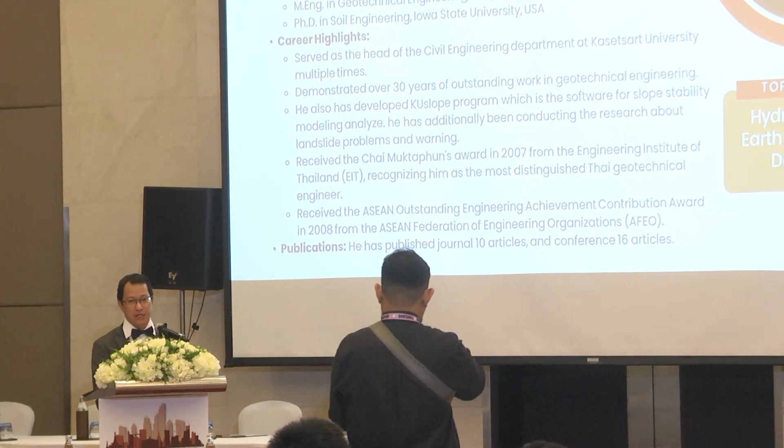He has so much professional work in the past, many dams designed by him, many dams rehabilitated by him. This is perhaps one of the topics he's going to discuss today: the latest project that is going to start soon. He did a lot of research and work on that before we erect the project next month.

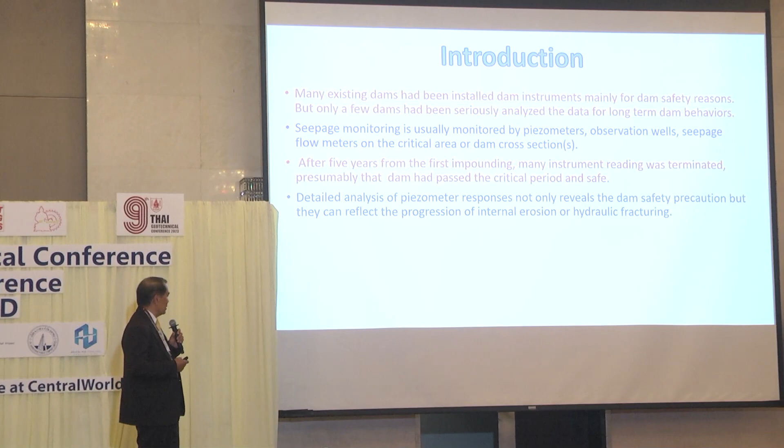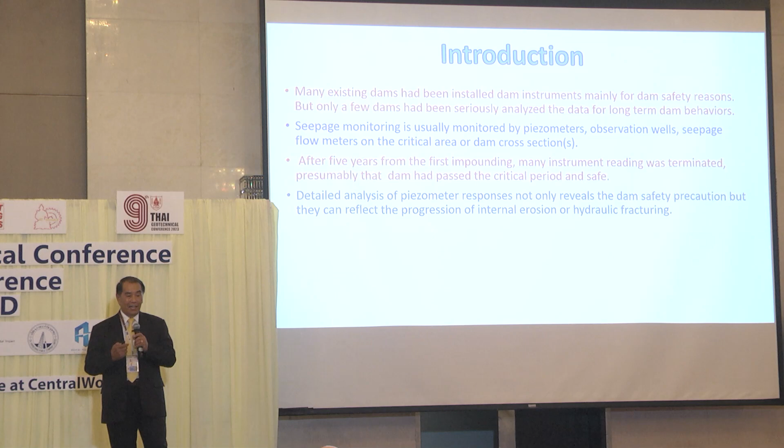Well, detailed analysis of piezometer response not only reveals safety precautions, but also reflects the progression of internal erosion or hydraulic fracturing. So if we take it seriously, we can detect the symptoms of hydraulic fracturing.

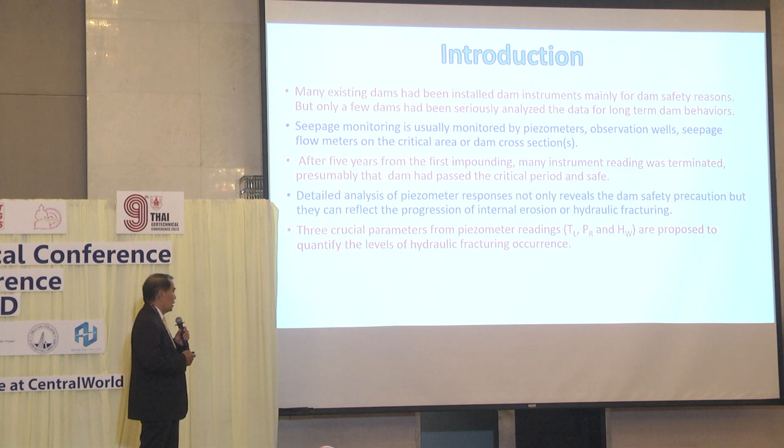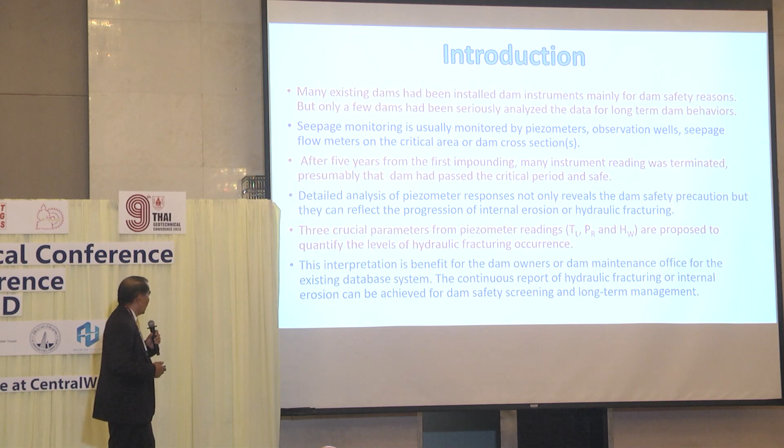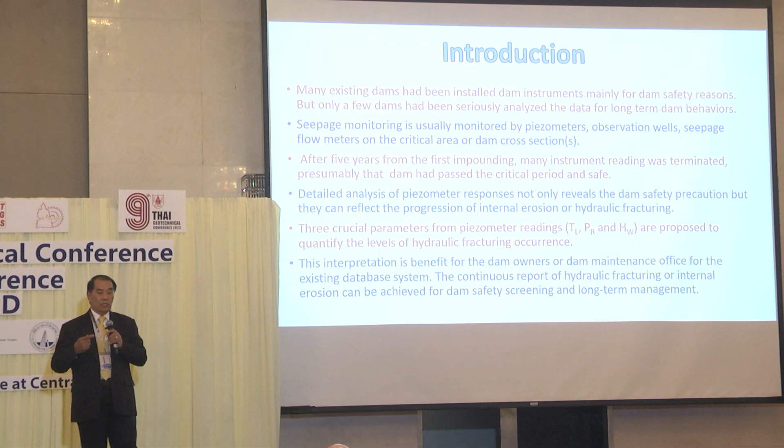So we propose three crucial parameters: time lags, pore pressure ratio, and reservoir water level, to quantify the level of hydraulic fracturing that can occur in the dam. This interpretation not only benefits the dam owner and maintenance office, but if combined with the dam monitoring database, it can continuously tell us the condition of internal erosion or hydraulic fracturing.

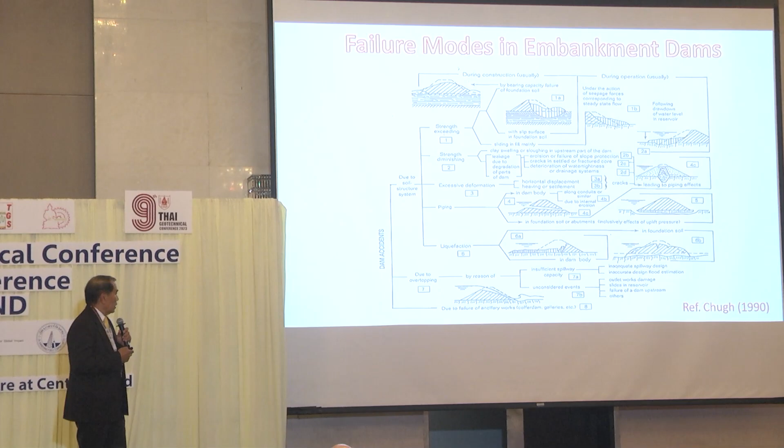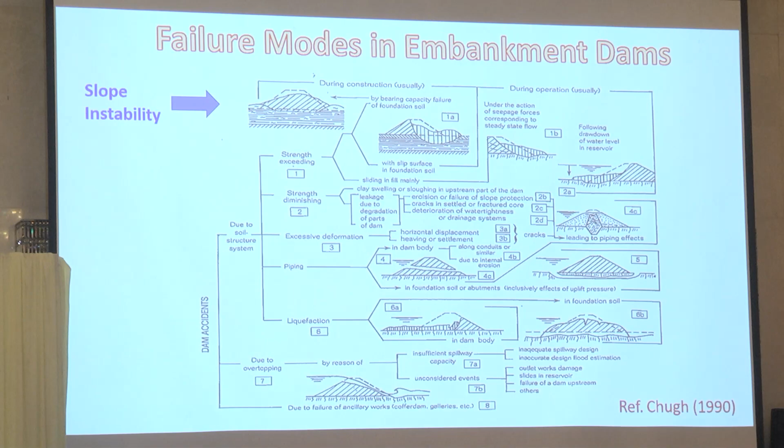Okay, I will take a short time to review dam failure statistics. Generally, a dam can fail due to instability of the dam itself—either the downstream or upstream slope can fail or slip—or it can fail by internal erosion, or it can fail by overtopping when you cannot estimate the amount of inflow correctly.

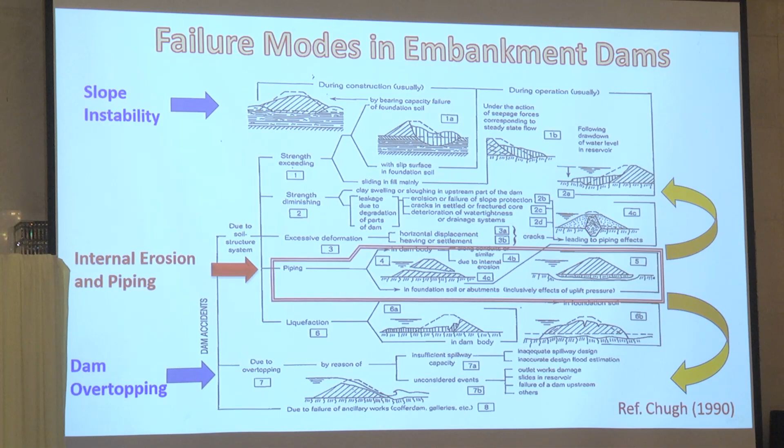But for internal erosion, not only can the behavior itself damage the dam, but it is also well related to the slope stability of the dam. If the pore pressure gets high, the factor of safety for slope stability gets low. And at the same time, when part of the dam fails, overtopping can also occur.

Okay, this is data from ICOLD, I think quite recent. Most of the dam types are earth dams, more than 65%. The purpose of the dams is mostly for irrigation. It's the same statistic in Thailand—most of our dams are for irrigation, okay.

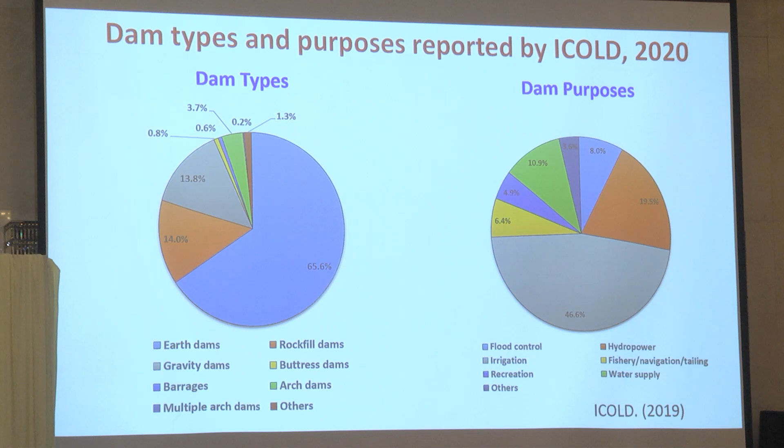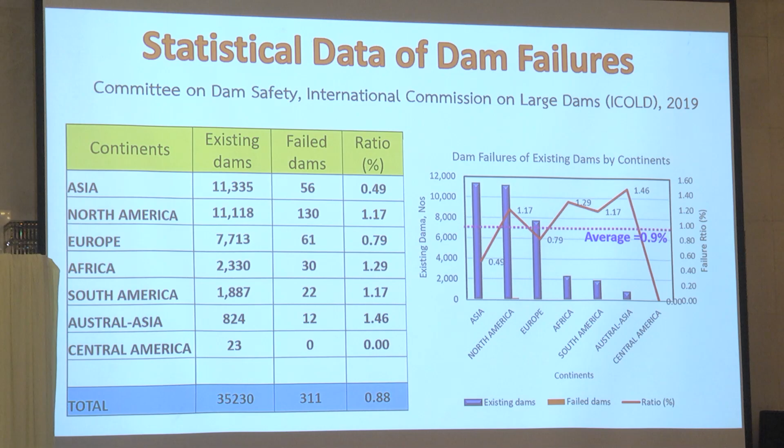For existing dams all over the world, classified by continent, the ratio of failed dams can vary by location. But in total, the average of failed dams is around 0.9%, or we can say 1%. That is quite high. In Thailand, fortunately, it's not that much.

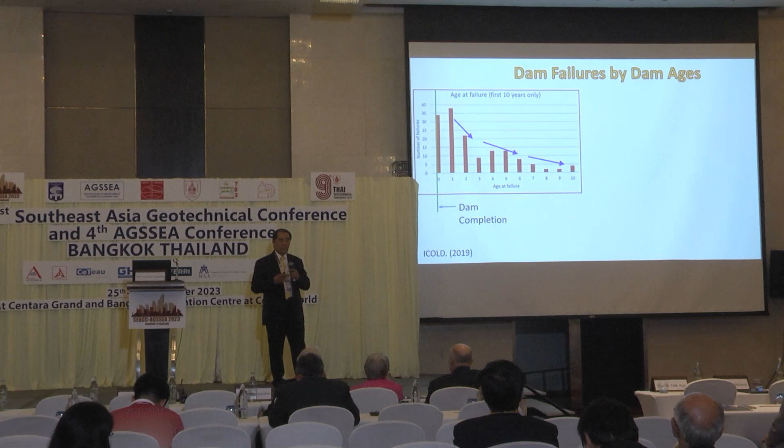After a dam is complete, statistics show that in the first year, just after first impounding, dams failed at a higher percentage, and then it decreased. Long-term data reveal it increases again when the age of the dam is more than 50 or 100 years or so, starting to increase again mostly due to deterioration of the material.

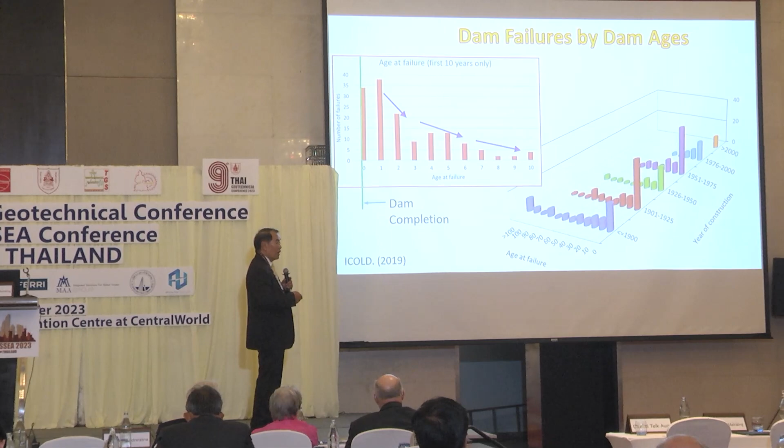It also reveals that before the 20th century, dams failed quite a lot. After that, dam technology got better and better, and the number of dam failures was reduced.

Especially after the World War, many military engineers came back from the war and brought so many technical inputs for the dams. Surprisingly, the issue concerning dam failure is a geotechnical issue, and from the past to the present, it seems to be decreasing, getting lower and lower.

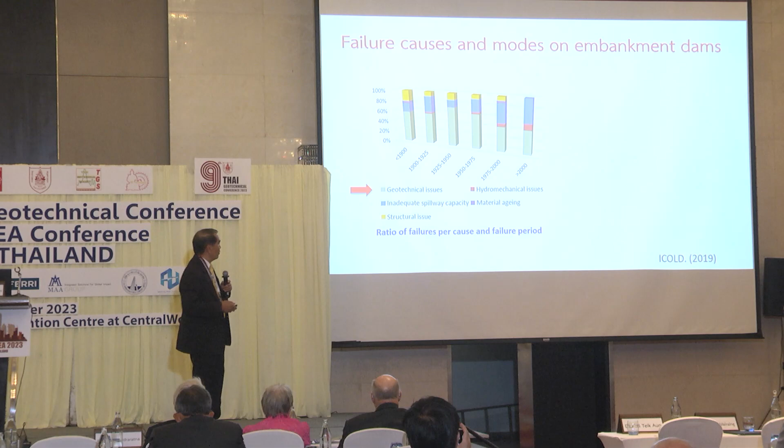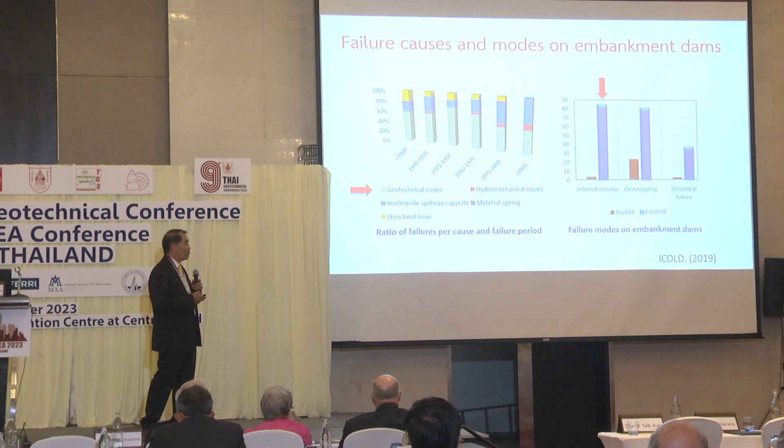And the mode of failure, internal erosion, is the top one. That gives you an idea how important internal erosion and hydraulic fracturing was. So now I will lead you to hydraulic fracturing in dams.

In the case study, people said Teton Dam was a classical failure that we learned a lot from. The erosion on the right abutment started at about 3/4 of the height, then progressed very fast, and finally it completely failed. It fell within 4 hours. I think the remnant of the dam still remains for study, but I'm not so sure—Professor Nelson can confirm.

USBR usually keeps this dam for case study.

The independent panel revealed that it's probably due to arching effects at the narrow core trench of the dam. Because this core trench is so narrow, it creates arching of the stress, bringing the stress within this area very low. Then if the stress is low, the pore pressure can exceed the confining stress and expand the crack or create a new crack.

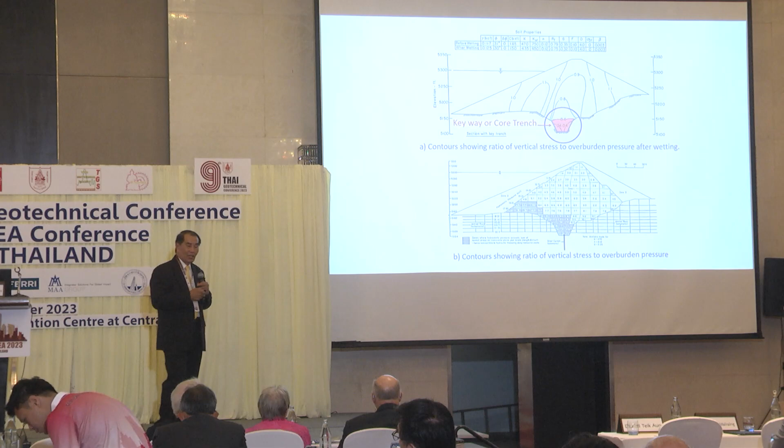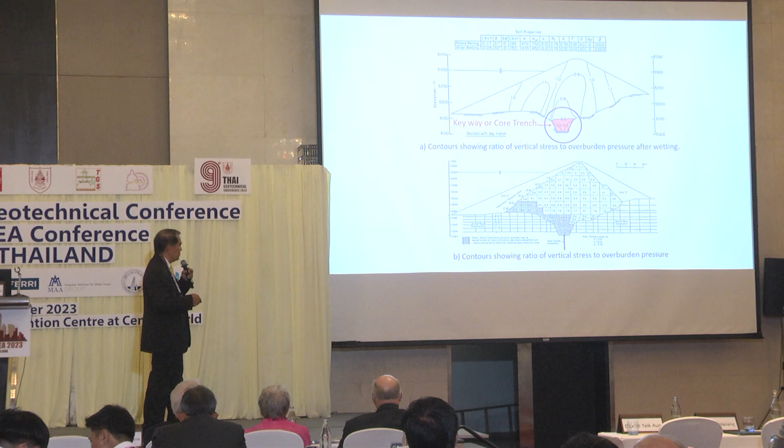This also agrees with some of the first finite element analyses, done I think by University of California at Berkeley, which also agree that there will be a zone of low stress over there.

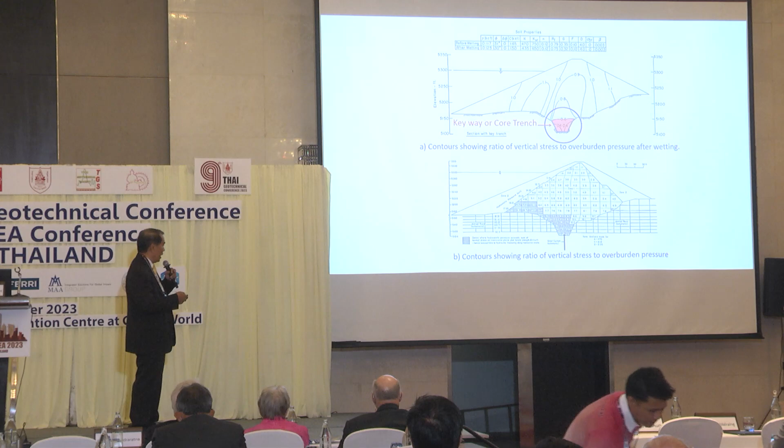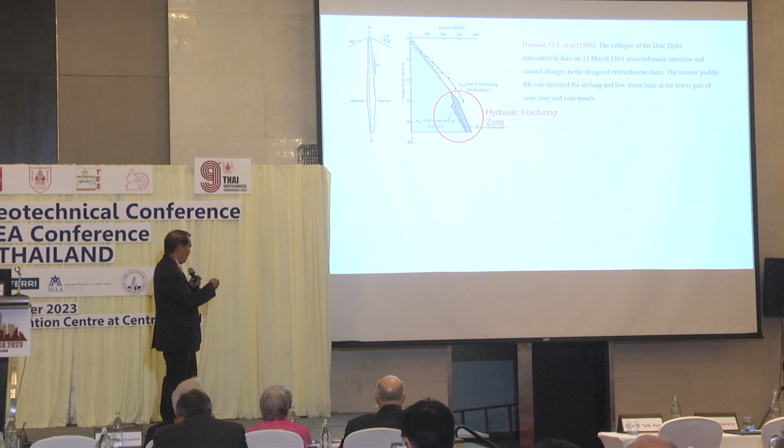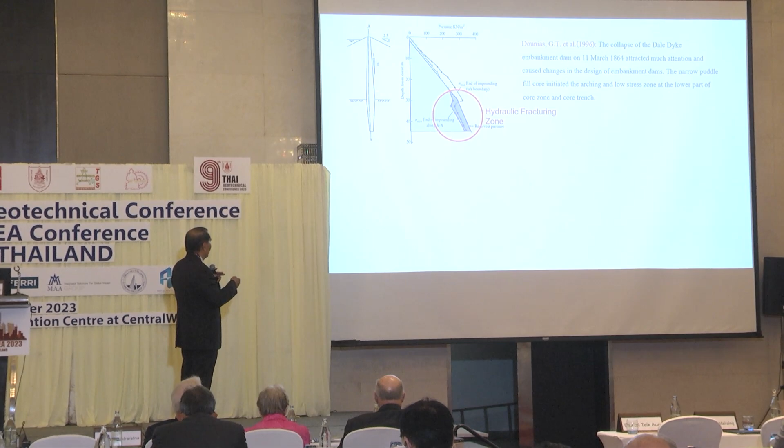Other dams too, like the Dale Dyke Dam with a very narrow puddle clay core, very thin, create hydraulic fracturing due to arching of this portion. That's why the pore pressure exceeds the minor principal stress in that area.

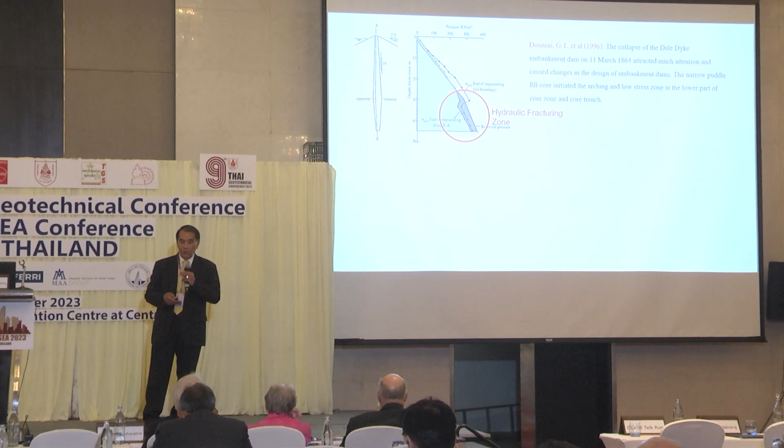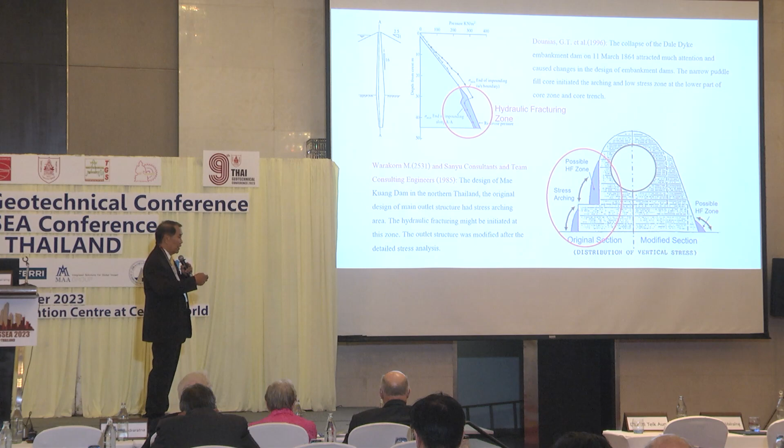Some classic failures or damages in our dams, in Nakhon Ratchasima, is Munbon Dam—that is internal erosion through the foundation of the dam. Fortunately, we participated in that occasion and also in the design of the remedial work for this dam.

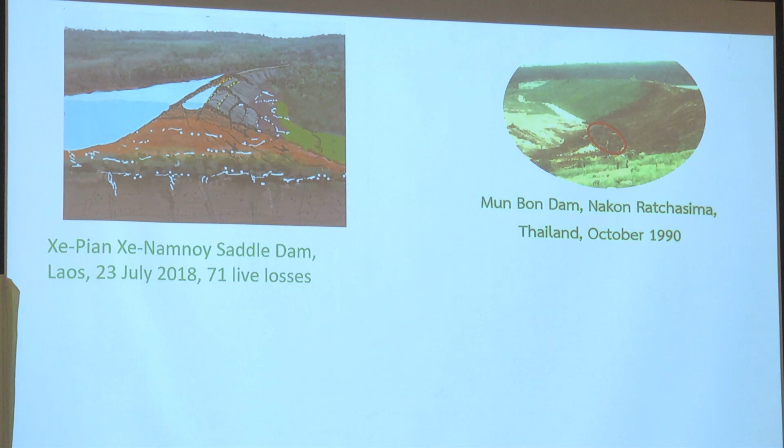Recently in Laos, the Xe-Namnoy dam also failed. There is literature saying it might be due to hydraulic fracturing through the foundation of the dam, but this case is not disclosed yet because it's still in court, so we don't know much about the data.

Sherard also mentioned that if there is any irregular shape of the foundation, even with a well-compacted embankment, it can create a low stress zone or arching zone, so in the yellow area the water can seep through.

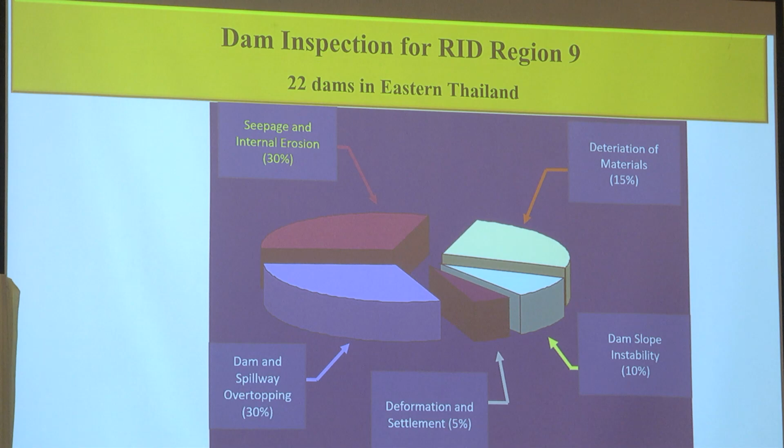The data I myself participated in for RID—we investigated about 22 dams. Not all of them are damaged, but we wanted to see the possible damage in the dam. It's concluded that seepage is one of the large percentages; it is seepage and internal erosion.

So what does hydraulic fracturing mean? It means that if there is an existing crack or a new crack that happened from differential settlement or any arching or something like that, the water can seep through. And if you have low stress, where sigma 3 is lower than the hydraulic pressure, then the crack opens up and the seepage progresses. That is a simple equation.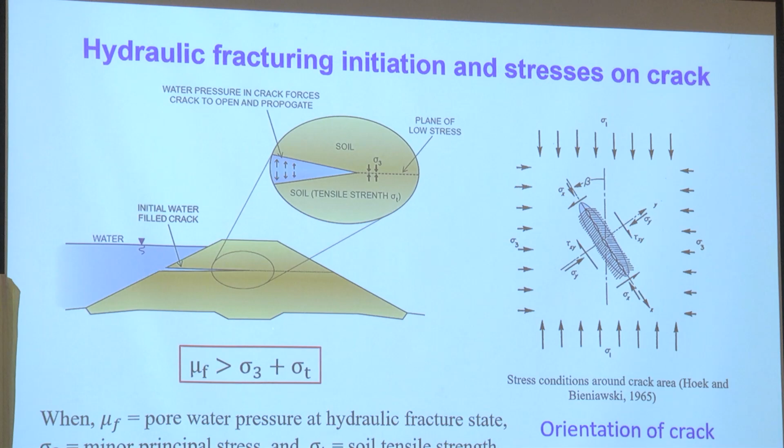So first, we want to see any relationship between the crack width and the permeability increase. Because this should tell us what is the possibility that the seepage increases with the permeability increase.

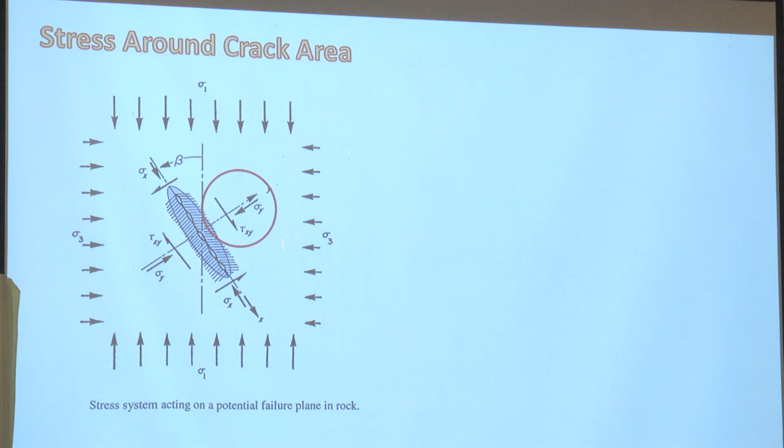So we try to set a model, using the basic soil mechanics theory based on the Mohr diagram that analyzes stress. We want to see if the normal stress, normal to the crack alignment, would be how much, and how it would create the closing or opening of the cracks. So we try to use that Mohr diagram.

Why? Because the orientation of the crack may not be horizontal. It can vary, depending on the foliations of the rock and the orientation of the rock structure itself.

So let's see, if we take one crack, it should be very small width, not as big as this. Normally if cracks exist, they fill with what we call filler, a piece of rock that flows in first, and if it's not large enough, it will plug into the crack.

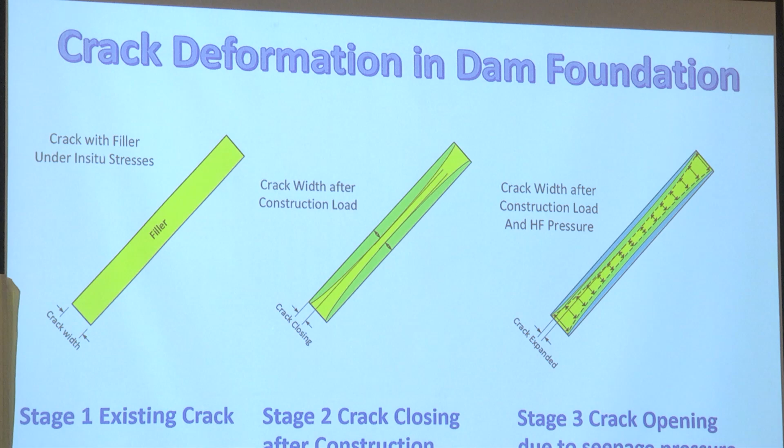And then after the impounding, the water in the reservoir starts to seep through and starts to open the crack again. So these concepts can be modeled by just simple finite element analysis.

So I will try to put this part going up so we can see that this is the wall of the crack, this is the wall of the crack, and when the construction loading comes up, the crack is closing.

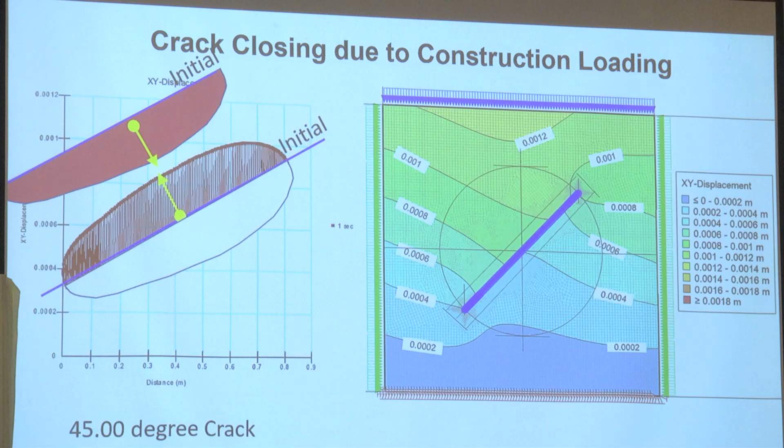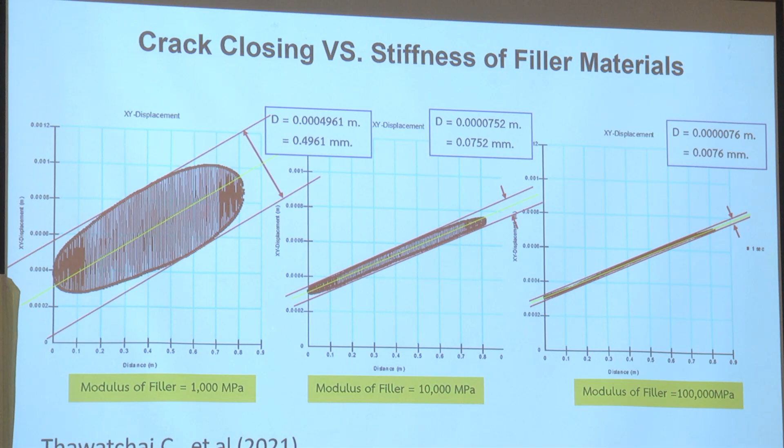So the crack closing depends on the modulus of the filler. If the filler is strong, the crack closing will be small. So we can analyze that, depending on the modulus of the filler, which has not been studied in detail yet.

Then it also depends on the hydraulic pressure that depends on the reservoir elevation also. When the water impounds at high elevation, the pressure that can expand the cracks will be high.

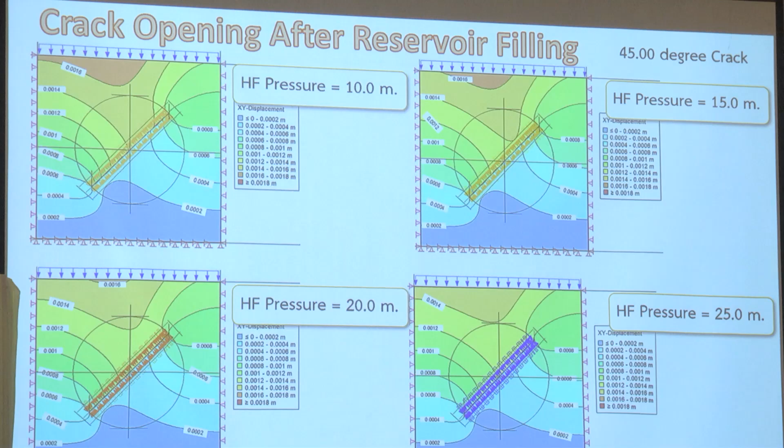Okay, then we think of the rock mass itself not containing only one crack. It may be a series of cracks. How much it is depends on the quality of the rock itself. So we can assume a simple model where the crack is here, with a certain spacing, and another crack is there also.

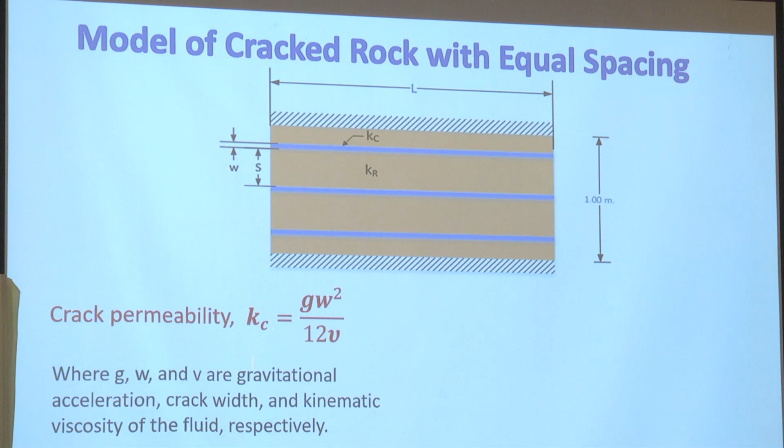So with the crack permeability, this is a crack permeability, meaning the permeability that the water seeps into the crack is equal to that much. Then if we calculate the whole mass with several cracks, the number of cracks...

So we can do what we call equivalent permeability of rock mass with the crack, depending on how many cracks or what the spacing of the crack is. And with that, we can make a relation between the permeability and the crack width and also the crack spacing.

So you see that in this range, the permeability of very, very fine cracks is even less than the permeability through the intact rock itself. So I would say this area we call intact rock permeability control.

So when the crack is larger than that, the crack will control the overall permeability. So we can call that rock crack permeability control.

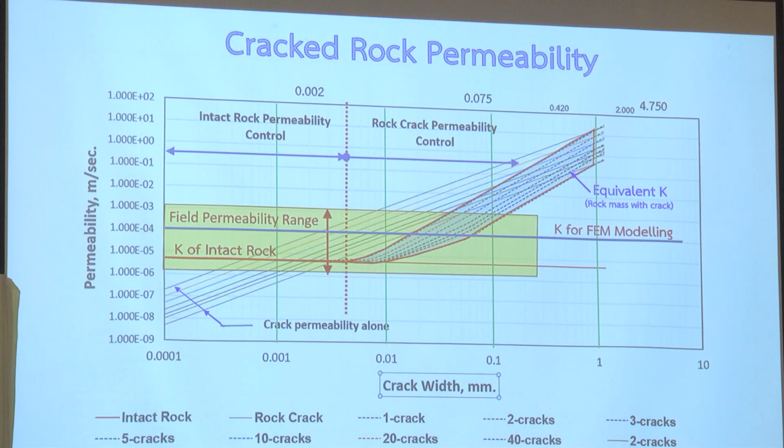In our case, we also compared to what we tested in the field, and it was found that the field permeability range is around that range. So for further analysis, we probably are going to use that for further finite element modeling, which agrees with the field permeability test also.

Okay, come to the case study. The study dam is an earth-filled dam, 33 meters high and about 400 meters crest length. It failed once in 1995.

The failure is quite classical here, and the wet area is found on the downstream toe also. This is the detail of the slump or slip surface, or you can call it a scarp, about 1 meter. Then the dam owner decided to put in a stabilized downstream berm.

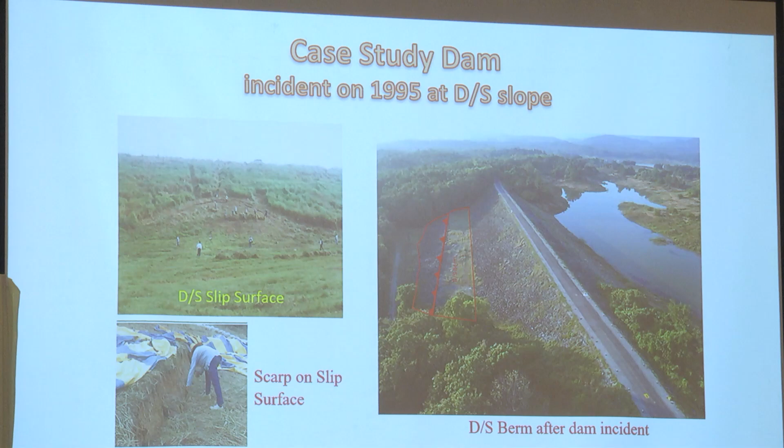Of course, it helps with stability, but it doesn't do anything about the internal erosion or the pore pressure in the foundation. So what we're trying to say is this can happen due to the complex geology of the dam site itself.

This is the dam site. It's essentially sedimentary and metamorphic rock. Why is it metamorphic? Because the intrusion of igneous rock on both sides intruded later and then squeezed the sedimentary rock into a ripple like that.

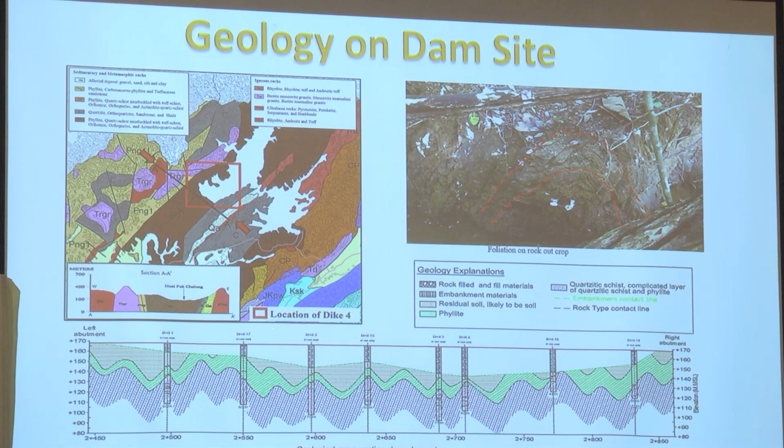So from some of our boreholes and the geological data that we found in the field, we can make an initial layer of phyllite like that. And the parameters from the field observations were compiled, and finally we ended up with some material properties for finite elements.

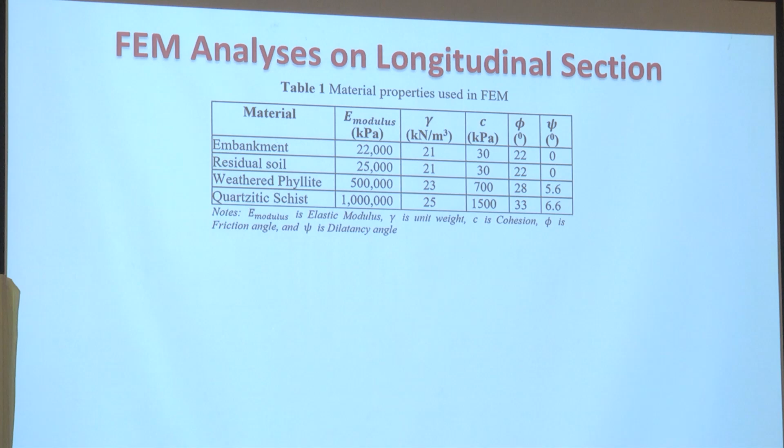And with the finite elements, we can calculate the minor principal stress. And using what we call the Mohr diagram, we can take a look at in which part the minor principal stress is lower than the seepage pressure.

Okay, when that happens, we can spot the point marked by the red dot, and then we can use some simple graphics to map the contour that creates the hydraulic fracturing zone like that.

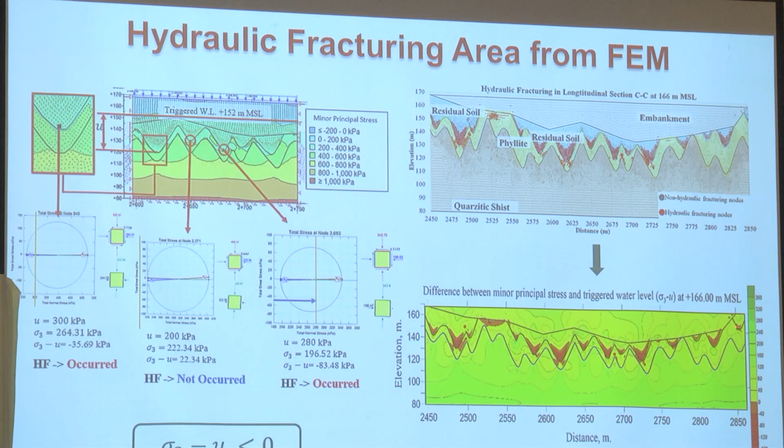This zone depends on the elevation or level of reservoir impounding. If it's quite low, 146, there appears to be no hydraulic fracturing zone at all. When we go to 150 meters mean sea level of reservoir elevation, it starts to show a spot. Going up again, the hydraulic fracturing zone seems to be clear. And going up more and more, okay.

Fortunately, this dam was limited to impound only that much, not over normal high water level. The excess will be released, okay. But even now, that normal high water level is lowered by 2 meters, just for safety's sake.

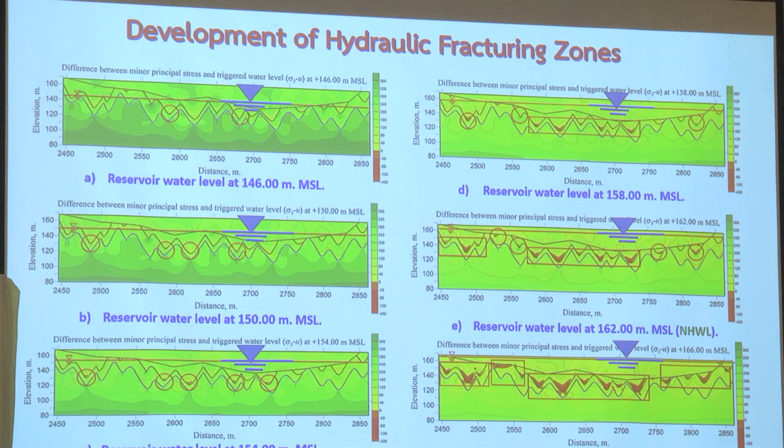So after some finite element modeling, we can set up an index that can tell the possibility of hydraulic fracturing. We propose something like a hydraulic fracturing index here. I will not tell the detail, but it consists of...

First, it concerns the geometry, the ratio of the depth to the width of the foliation. The second term concerns the reservoir elevations, and the third term compares the modulus of the fill material and the modulus of the rock material that has a foliation like that.

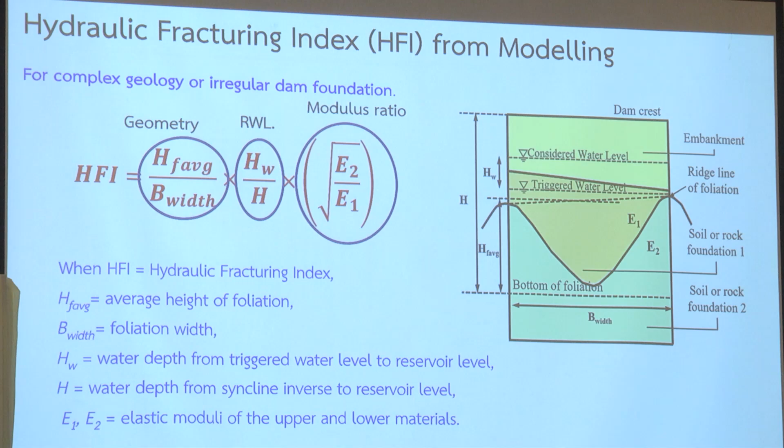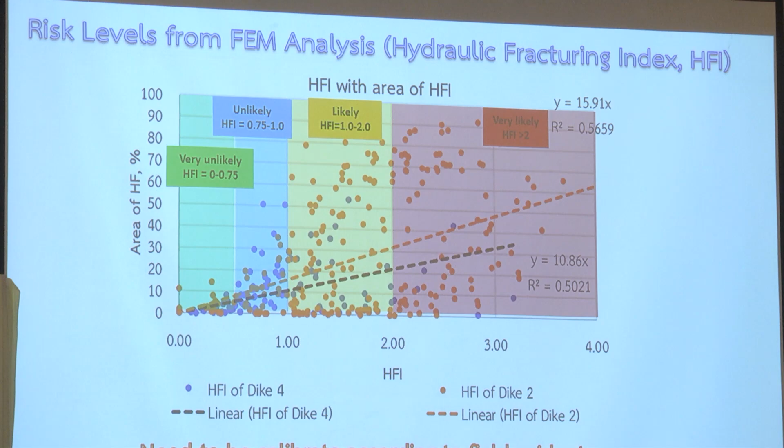So by that, from the analysis alone, we can also tell the level of possibility of hydraulic fracturing from finite element analysis. Why did I propose that? Because if you design a new dam, you don't have any instrument at all. It's not constructed yet. So you have to forecast whether there's any risk for hydraulic fracturing. If so, you have to take care of monitoring later on.

Then come to the existing dam that is already built and monitored. With a simple instrument that Professor Brand kindly presented this morning, dealing with the piezometer—he was a student at that time, and he brought me a lot of piezometers for testing with my master's thesis. Thanks for that, I learned a lot.

Usually the piezometer is the first choice for instrument, and next might be earth pressure cell and seepage flow meter and so on. Maybe most of you are already familiar with geotechnical instruments.

For this dam, unfortunately, before the incident, there was no instrument at all. But after the incident and repair work, the dam owner started to install instruments. So after about 20 years without instruments, and from that incident, we got information about 22 years after that, after we put up the instruments. So the data we are going to show here is for 22 years, the latest period of the dam.

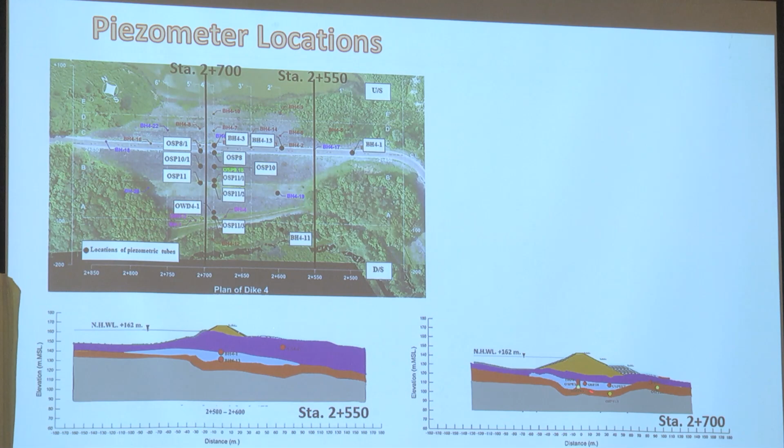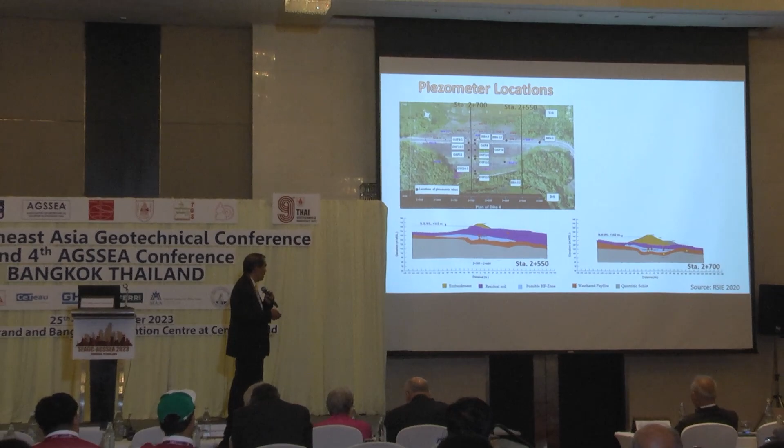The number of piezometers is also limited to the dam axis and the downstream area. The yellow one is the dam embankment itself, the purple one is residual soil, and the lower part of residual soil is probably the hydraulic fracturing area or zone. The brown one here is weathered phyllite, and the lower one is much stronger, a quartzite schist. And this is a list of instruments.

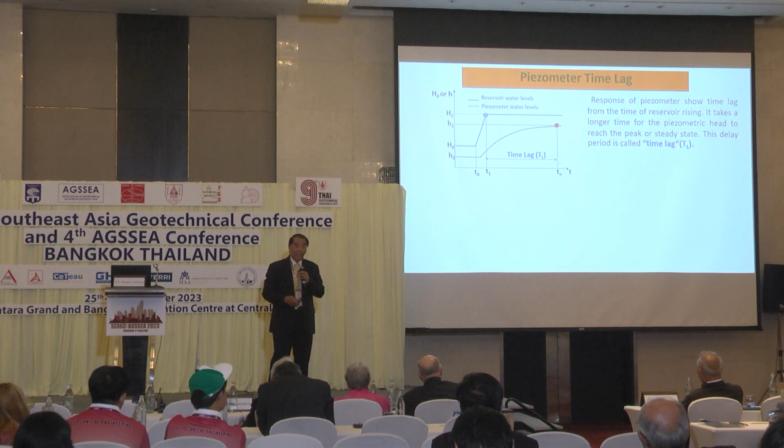Now, how are we going to deal with time lag? When you measure pore pressure in the dam, the response will be late compared to the reservoir rising. The reservoir rising is supposed to be here—reservoir water level goes up, and if it stabilizes, the pore pressure measured from the piezometer starts going up later and may reach its peak below that. So if compared, the peak from the blue dot to the red dot, this delay is called time lag.

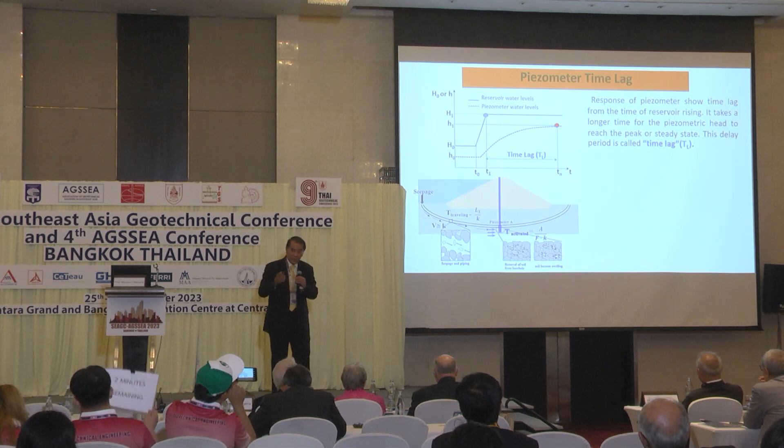The time lag comes from two sources. The first is the time of traveling from the reservoir to the area of the piezometer, which takes time for water to travel. The other is the time that pore pressure around the piezometer tips takes to flow into the sensing instrument in the piezometer itself—oh, time is up, okay let me try to finish up. So it's traveling time and activated time. Normally, in our case, we can neglect the activated time and consider only the traveling time.

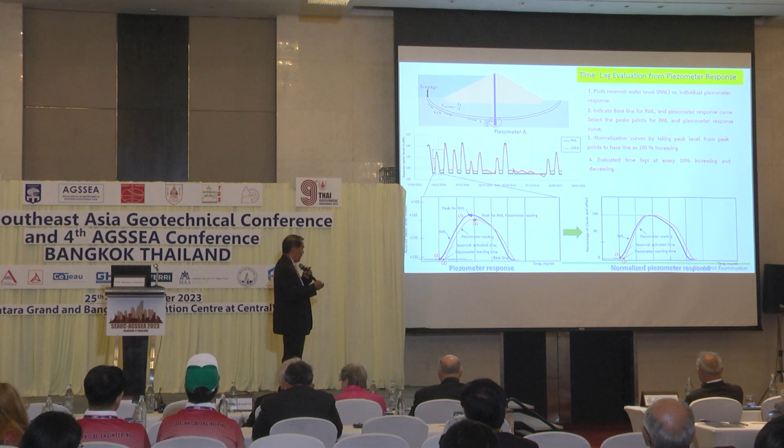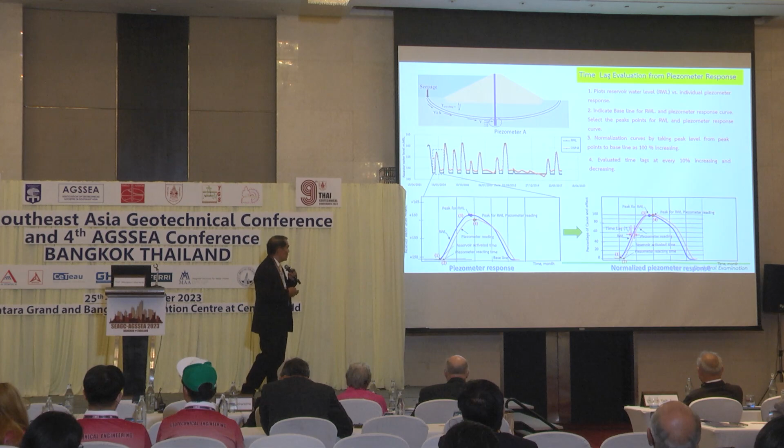This is the response we obtained from field observation. The problem is it's very difficult to compare between the reservoir water level and the observation, so we have to normalize it. If we take the maximum of each as 100%, we can compare reservoir water level and piezometer reading, and with that we can also compare the time lag at every stage. We can even take every 10% of the maximum, which helps a lot because we get more data.

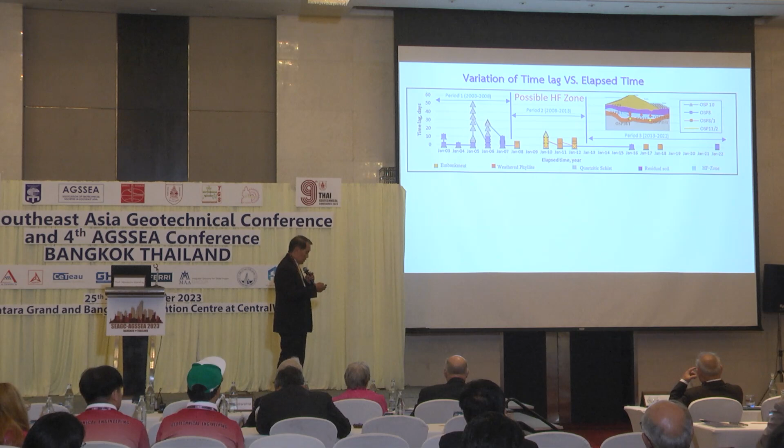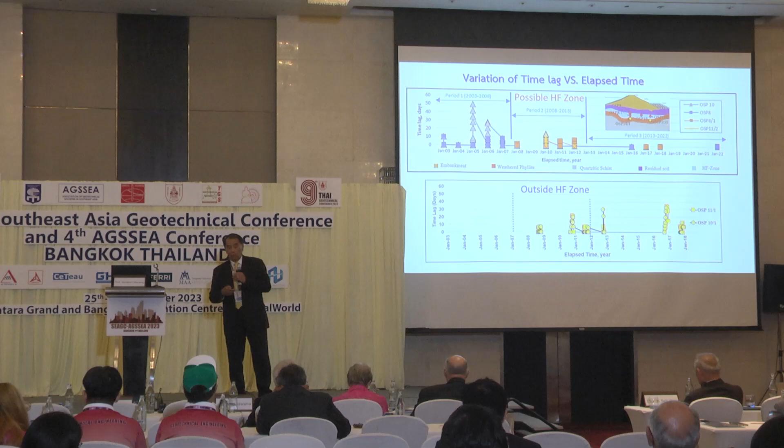This is a compilation of the variation of time lag with time. In the first period, from around 2003 to 2008, the time lag is sometimes low, but it still shows some time lag, with a maximum of over 50 days. In period 2, from 2008 to 2013, it becomes low, about 10 days. For the latest period, it doesn't show any time lag at all, meaning water can seep through very fast to the piezometer tips. Compared to outside the hydraulic fracturing zone, there's still a time lag—not very long, but still present.

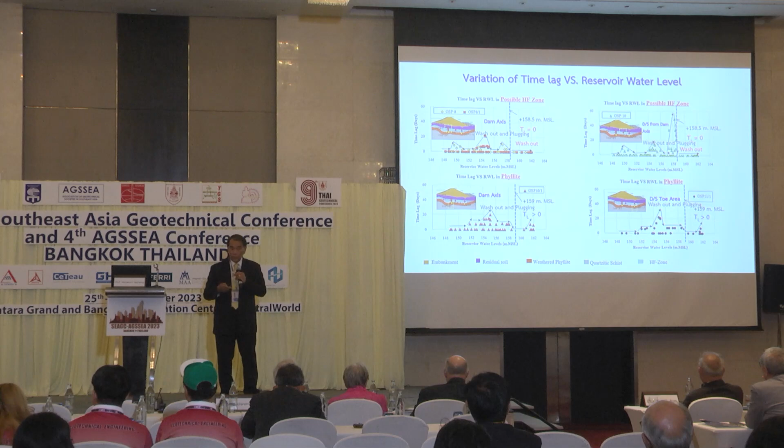The time lag also indicates a possibility of washout and plugging alternated. If the water comes and washes it out, the pressure goes very fast, and if it is plugged, that means it's slowing down. I won't go into detail, but you see in the area of no hydraulic fracturing zone, the alternate fluctuation of washout and plugging still shows. But in the hydraulic fracturing zone, no plugging at all.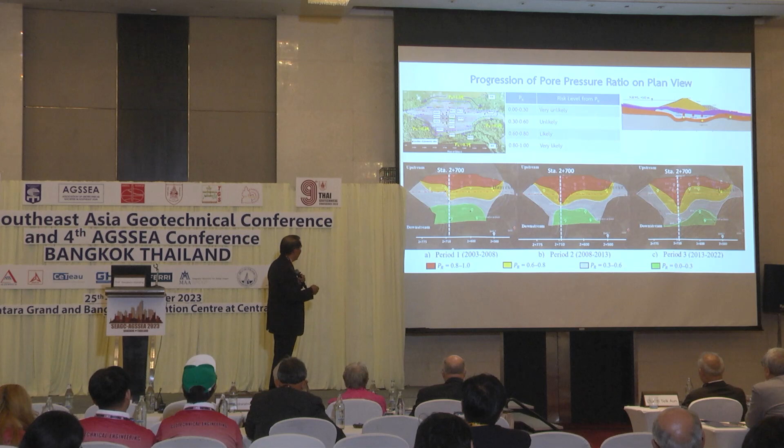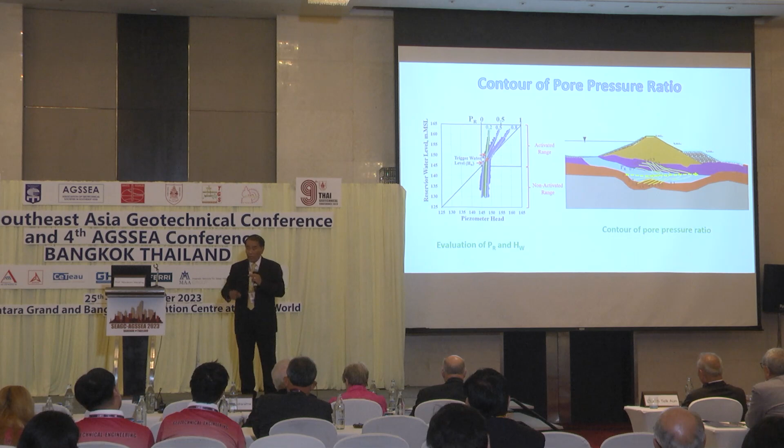Maybe two more parameters. The last thing is the trigger level. When the reservoir is rising at the first state, there's no response from the piezometer. But if it reaches the trigger level, it starts to move according to the increase of the reservoir water level. So we use that as the trigger level. That means if the trigger level is lower, it's easier to activate the piezometer.

In the possible hydraulic fracturing area, the trigger level always moves down or decreases. That's not a good sign, because it means it's easy to trigger. But outside the possible hydraulic fracturing area, the trigger level seems to be constant.

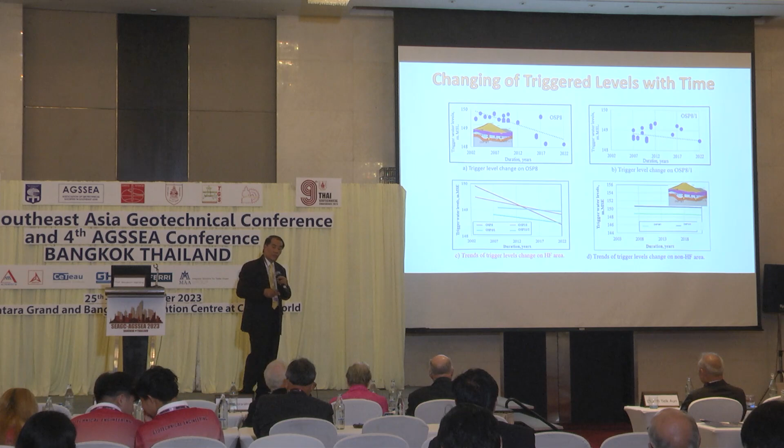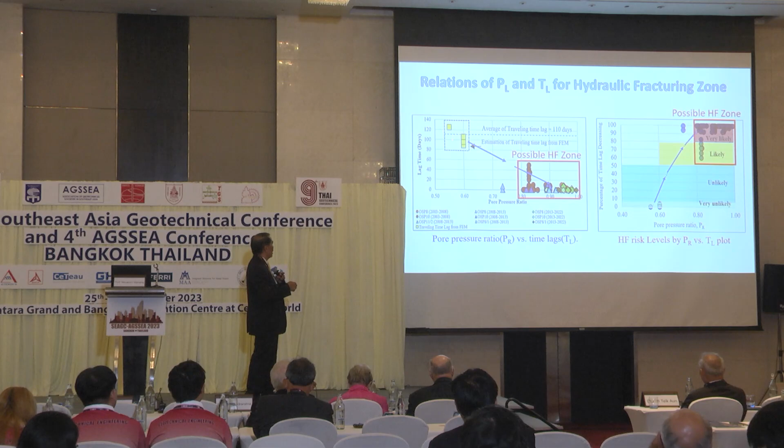With the help of these two parameters, time lag and pore pressure ratio, we can establish the relationship between the ideal case without hydraulic fracturing and the possibility of hydraulic fracturing. That means the time lag will be very, very short, and the pore pressure ratio will be very high. With that, we can also classify the range of the risk level.

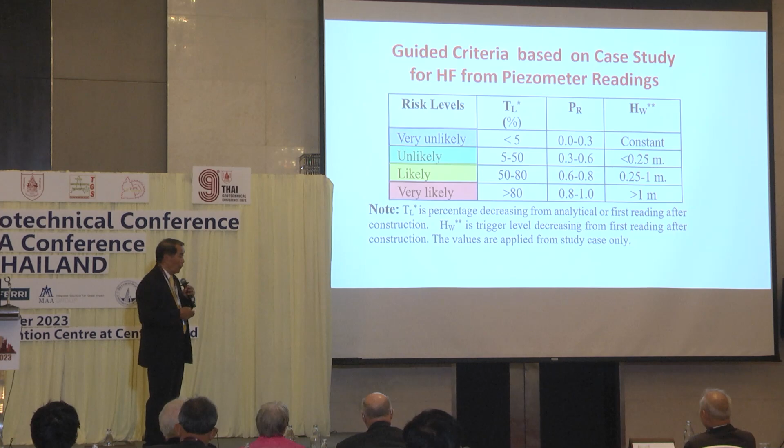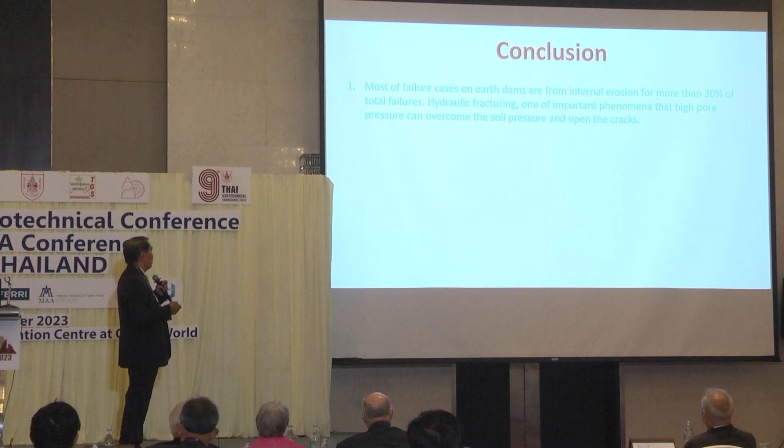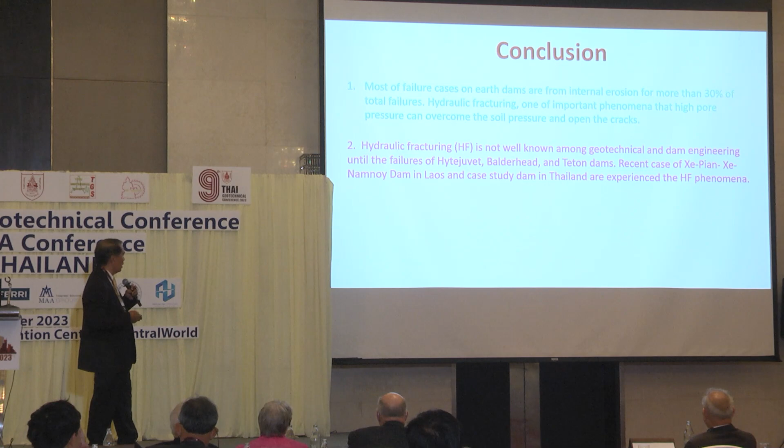Now I'll come to the conclusion, I'll finish it now. Most failure cases are from internal erosion, and hydraulic fracturing is not well known among geotechnical and dam engineers, affecting so many dams. This study dam is quite a typical earthfill dam—not very high, not very large, but a small size dam.

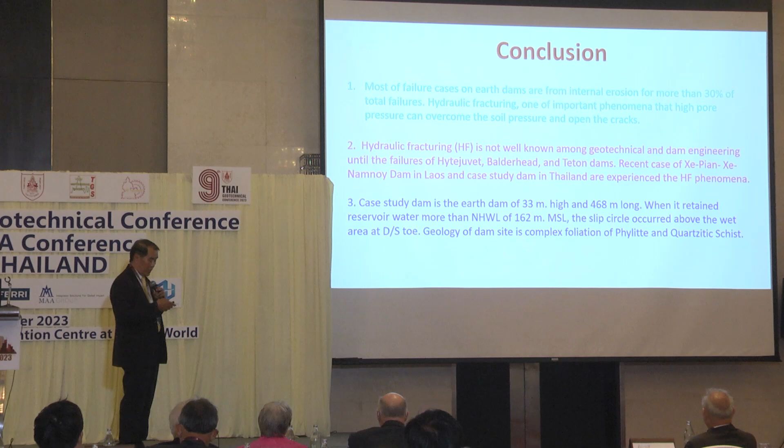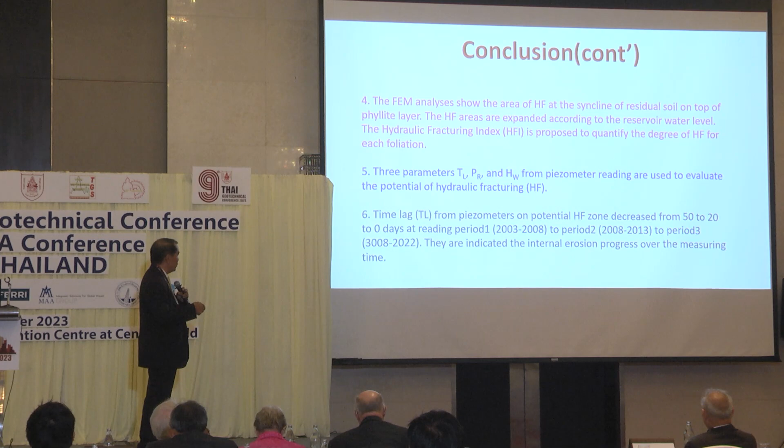Finite element analysis will show hydraulic fracturing related to foliation, syncline, anticline, and so on. We can conclude with a hydraulic fracturing index, which is good for designers before we have instruments installed. After we install the instruments and get the response, especially from the piezometer, we use three parameters—time lag, pore pressure ratio, and trigger level—to quantify the possibility of risk of hydraulic fracturing or internal erosion.

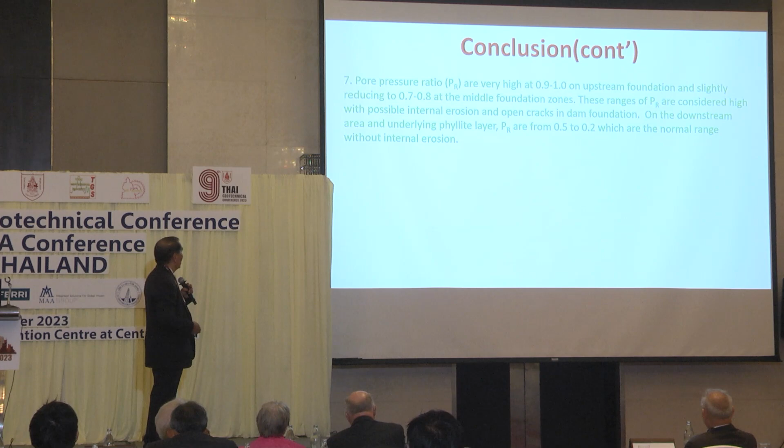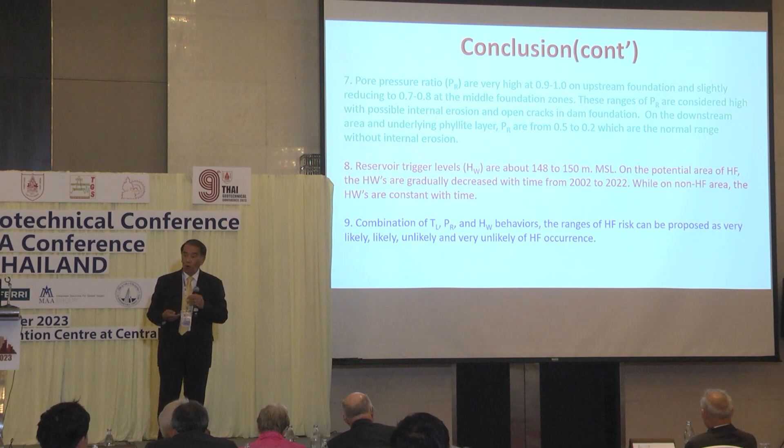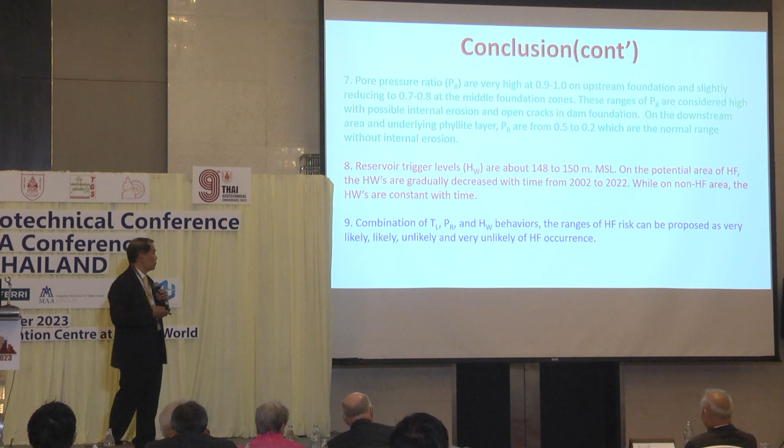And then, of course, the trigger level. The last point is that with the combination of time lag, pore pressure ratio, and trigger level, we can set the risk level for each particular dam. So you can use that to assess the progression of internal erosion in the dam. I think that's all—thank you very much for your attention.